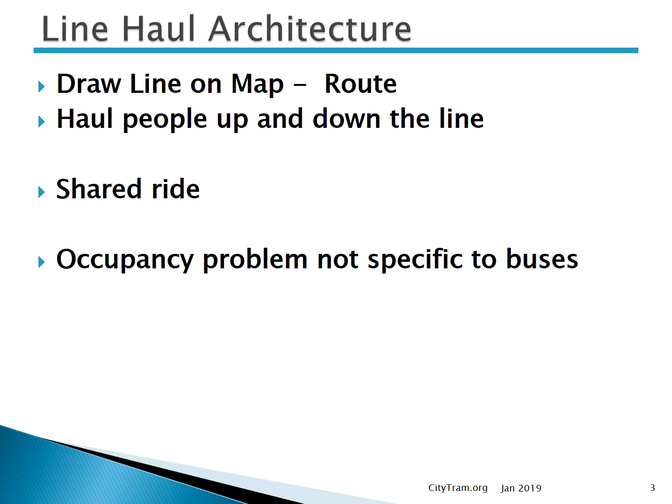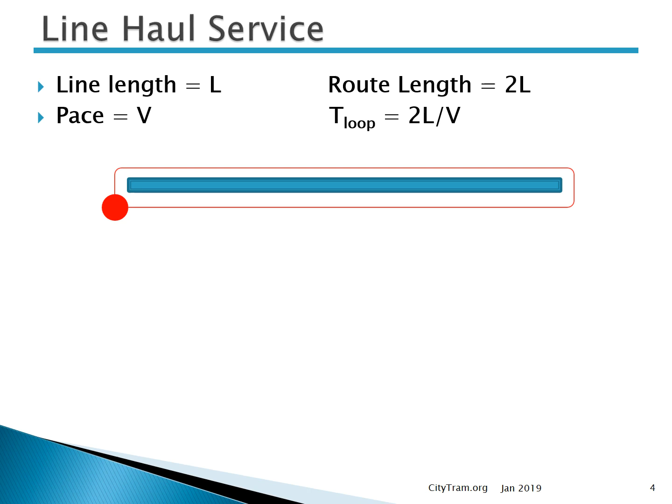As I said, you draw a line on a map. But if we're going to haul people both up and down that line, then the route itself must actually be a loop. So if the line length is L, then the route length is 2L. And if the vehicle can proceed along that loop at a velocity of v, then the time it takes to complete a single loop is 2L over v. Now, this is important because that's the natural headway.

If you stand at a point along the route and measure the time from one vehicle arrival to the next, that's the headway. A rider who shows up at a stop is going to have to wait till the next vehicle arrives. That wait time will be somewhere between 0, if he's lucky, and the headway, if he's not. On average, a population of riders will experience wait times about 1/2 of the headway. And it's this wait time, almost more than anything else, that's the rider's measure of the quality of the transit service.

So this equation is the key to the quality of the service we offer, so it must tell us what we can do to improve the service. To shorten the wait time, we need to either reduce the route length or speed up the vehicles. Now, shortening the route length is rarely practical. After all, the route was designed specifically to connect certain neighborhoods to other neighborhoods. We can't move those neighborhoods, so we cannot change the distance between them. And if we cut off a few of the neighborhoods from the ends of the route in order to shorten it, then we would lose the riders from those neighborhoods that the route was intended to serve.

So really, increasing vehicle speed is the only option we have. But as long as buses share the road with cars, that's not practical either. The only way to increase vehicle pace is to give the vehicles an exclusive, or at least semi-exclusive path. This is why some people often claim that rail is faster, right? It's not the fact that the vehicle rolls on metal rails. It's the fact that the rails operate as an exclusive guideway. The vehicle is thus freed from the regulation of traffic lights and from congestion and other interactions with cars, bicycles, and pedestrians that would slow it down.

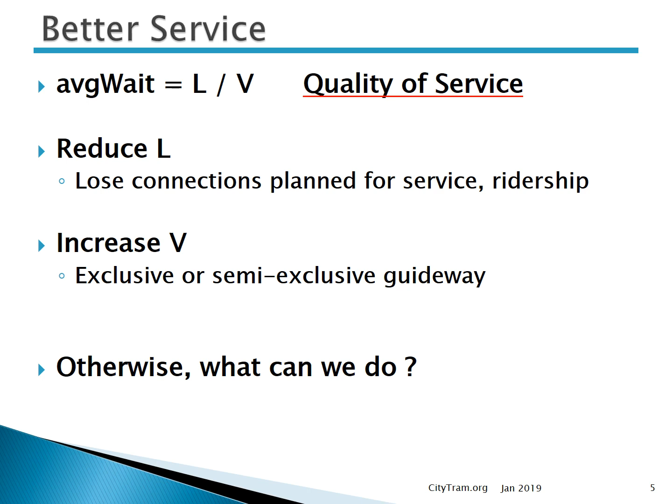Streetcars are proof of this, right? They operate on rails, but those rails are placed in lanes of traffic. So streetcars have to interact with the automotive and the pedestrian traffic. And streetcars are, in fact, no faster than regular vehicles. But allocating a lane exclusively for use by buses often means eliminating a lane from use by cars. This most often is an unacceptable option. So what else can we do to reduce the wait time for buses?

Suppose we use the power of parallelism. Let's put a second bus on the route and position it equidistant from the first bus. This cuts the headway and the wait time in half.

Now, in fact, this is a general solution. If we deploy n buses to service a route, the headway is the loop time divided by n, and the average wait time is only 1/2 of that headway.

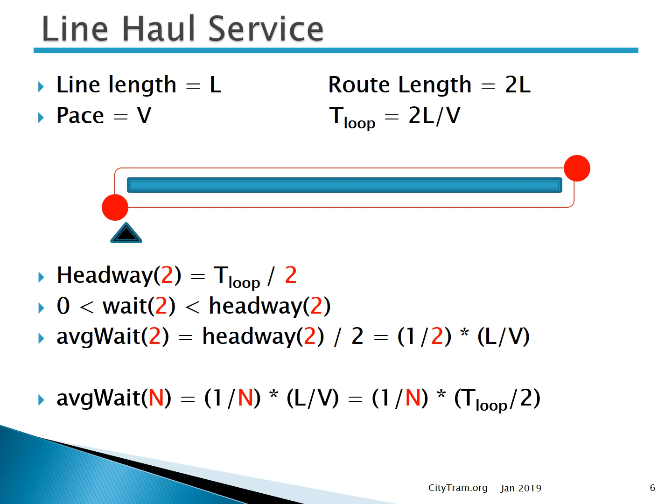Now, while in theory this seems like a good thing because it means we can provide any level of service we want, in practice it's not really very good at all. The shape of the headway curve exhibits diminishing returns. This means often we have to have a large number of vehicles in order to achieve the desired level of service.

And the line haul architecture has some really unfortunate linkages. It links service level to cost. It costs in excess of $500,000 to purchase a bus and approximately $450,000 per year to operate one. So providing better service is extremely expensive, and it's unlikely that the incremental cost will be recovered by increased ridership. I'll give you more on that later.

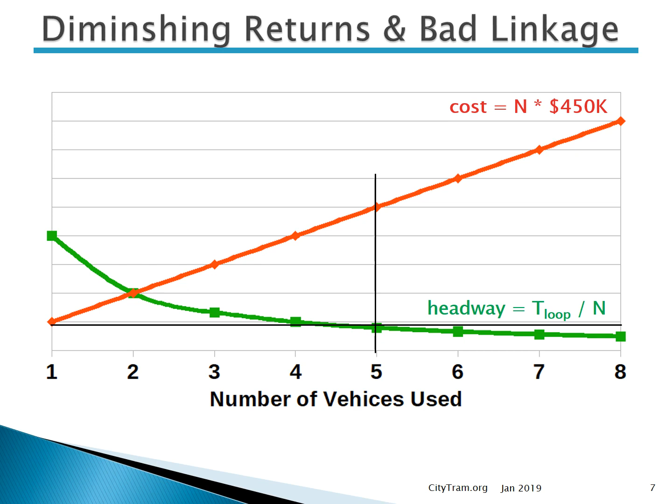The architecture also unhappily links service level to capacity. We get better service by adding buses, but that adds more seats. We didn't need to add more seats, but it's unavoidable. Note that we have the same number of riders and they are traveling the same number of miles. But in order for those riders to wait less, we now have n buses operating simultaneously instead of just one. So vehicle miles is n times greater. Average bus occupancy is therefore reduced, basically because we've added n-1 empty buses.

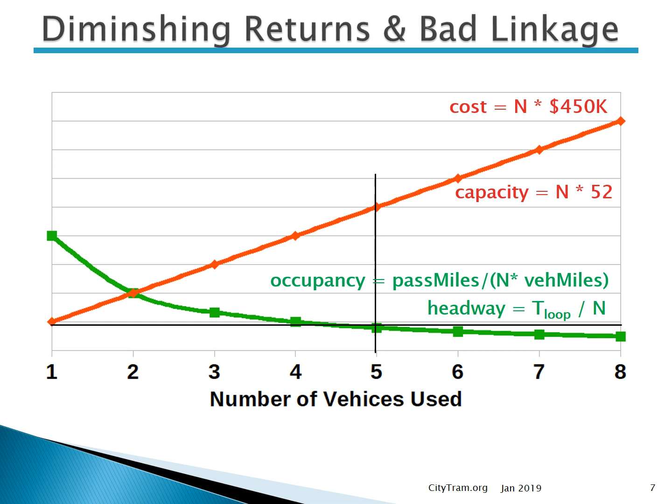Now, our ridership is not evenly distributed over the n buses at any point in time. And that's because our ridership is highly migratory. Our zoning forces it to be so. We only allow mixed-use zoning minimally. Mostly we separate residential use from commercial use and industrial use. And we typically concentrate that commercial and industrial use. We have shopping centers and business parks and downtown areas, and they're separated from residential developments and apartment complexes.

So our dominant mobility need, which is that of the commute pattern, involves moving people from large, lower density residential neighborhoods into and out of the centralized, higher density commercial areas at the beginning and ending of each day. Our transit routes are then defined to access those diffuse residential areas, usually radially like the spokes of a wheel. This gives the routes a directional migratory flow.

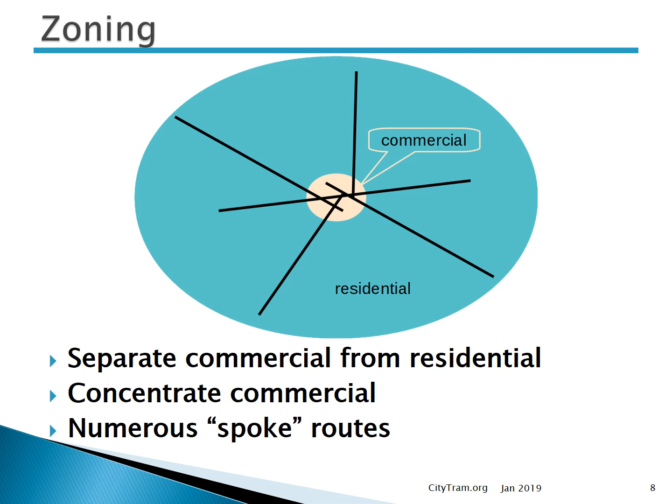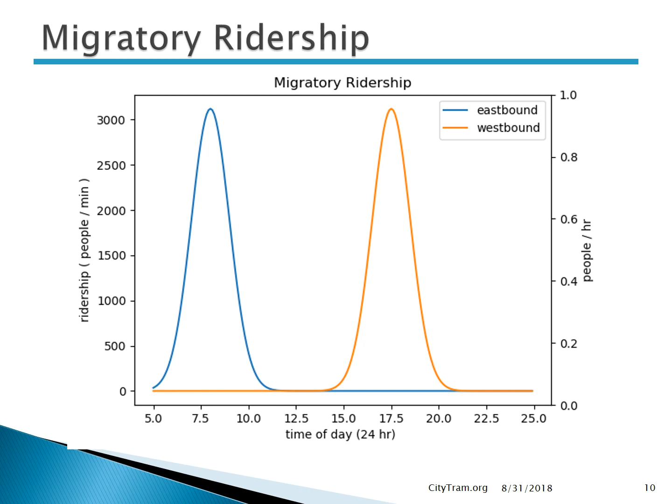Overall, we just cannot escape the fact that we have the same number of riders being carried by 4 buses rather than by 1 bus. So the average number carried by each is lower. The story is the same for the westbound afternoon riders. With fewer commercial stops that are closer together, it's only the riders' arrival time at the stations that can distribute the ridership across buses. So this explains our experience.

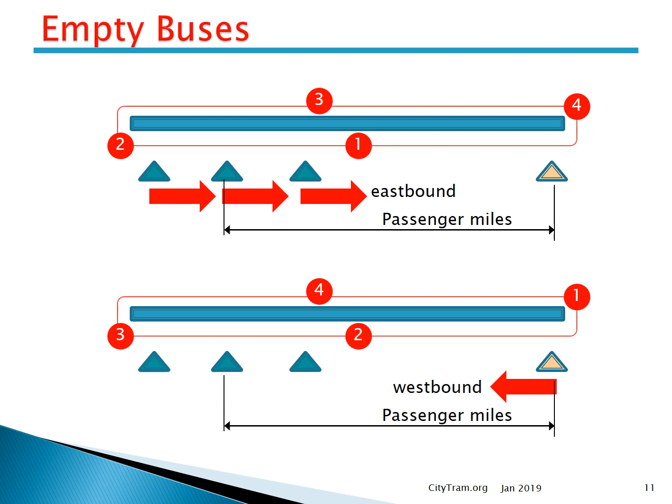We observed bus number 1 jammed to the gills leaving the commercial station in the afternoon. But what we don't see is the other 3 buses rolling empty at that single exact same point in time. This is why average occupancy is very hard to raise. The things we do to improve the quality of the service also increase capacity and thus decrease average occupancy.

Now, some people would argue that improving the quality of the service should result in an increase in ridership. Well, that's possibly true. But to offset the negative impact on the cost and occupancy, we would need that ridership increase to be at least linear by the same factor n. And this is not going to happen.

First, the time needed for a transit trip is actually the sum of 3 components: the time walking, the time waiting, and the time riding. The service adjustment we described only impacts the time waiting. So not only does it scale in diminishing 1/n terms, but the trip time impact is even less than that because the walking time and the riding time are not affected.

Now, a useful metric is the ratio of trip time by existing transit versus the time for that same trip by car. Now, if this ratio is already relatively small, say maybe 1.4 as shown on the right, and with a service adjustment or improvement we can bring it down to say 1.1, then that improvement might actually get some new riders. A 10% or a 15% time penalty may be acceptable to some people in order to have a less stressful commute or a more reliable trip time, or if they can make more productive use of that travel time.

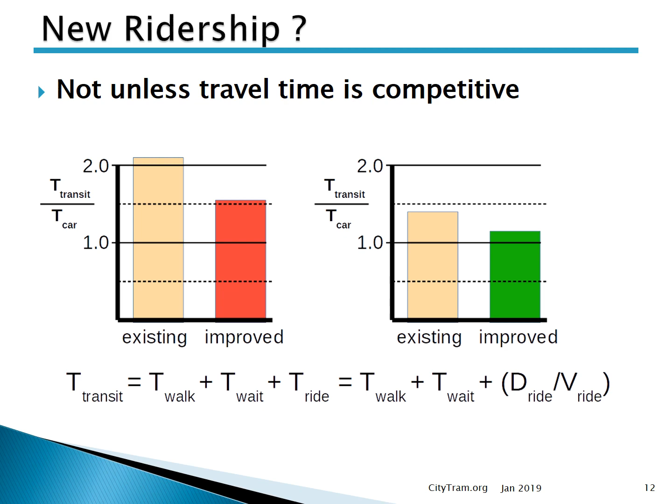Even though it's not a cost-effective solution, one of the arguments given for why mass transit is still a good choice for cities is the emissions benefit it offers. Remember the poll I began with? Well, there's not actually a universal answer here. You are right sometimes in some places under some conditions.

According to a December 2017 report from Oak Ridge National Laboratory, our light-duty vehicle fleet in America gets on average 22.0 miles per gallon. And we mainly drive alone in America. The Census Bureau shows us that the average vehicle occupancy varies only plus or minus 0.1 across the nation from its mean of 1.2. So cars in America move people at about 26.4 passenger miles per gallon.

The APTA fact book for 2017 puts the fuel efficiency for diesel, biodiesel, and compressed natural gas buses at about 3.7 miles a gallon. Now the national average for bus occupancy is 9.8. That's only about 18.8% utilization of a 52-passenger bus. But on average, buses operate then at 36.3 passenger miles per gallon and are, in fact, better than cars.

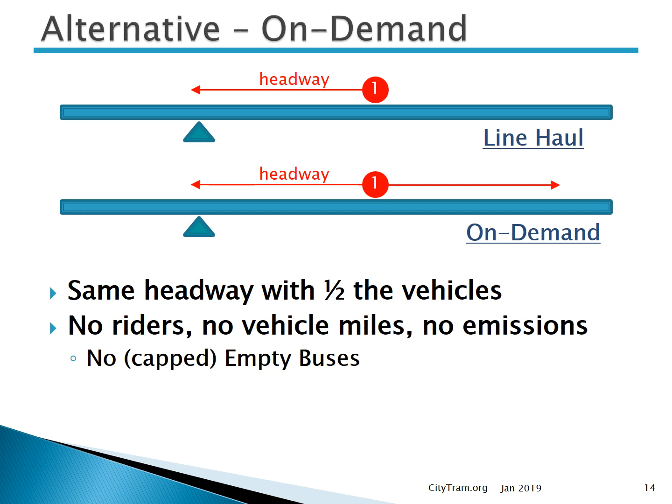So I'm hoping you're beginning to better understand now what CityTram has been saying repeatedly. Everything we use currently for public transit implements line haul architecture. Line haul is a terrible architecture for city transit. It has very limited ability to adjust quality of service, and the adjustments it does offer pit quality of service against other very important attributes like cost and efficiency.

This forces a choice that has no desirable solution. You either have to pick quality of service or affordable cost and acceptable efficiency and emissions. You cannot have both. As a result, our services are poorly utilized and emit wastefully. But we cannot abandon line haul unless we have an alternative. So I hope you also see that there is at least one, and it's a better one. It needs half as many vehicles for the same level of service, it maximizes occupancy, and it emits nothing when there are no riders.